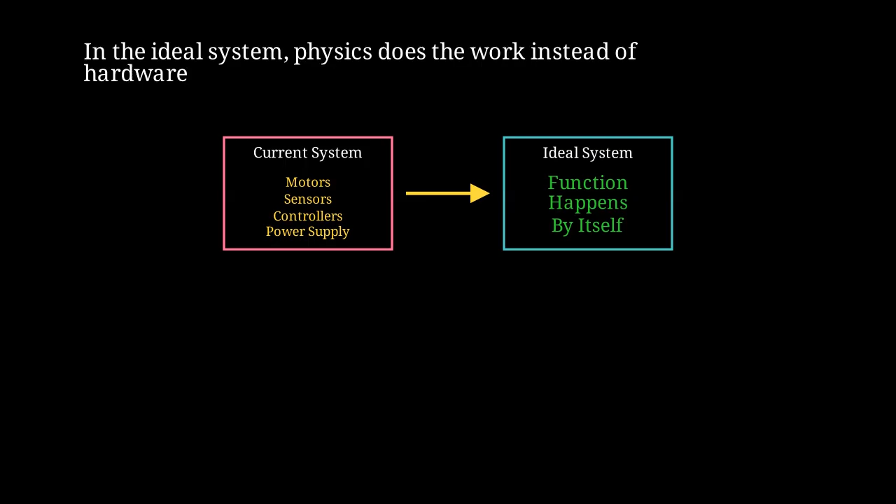Compare a current system loaded with motors, sensors, controllers, and power supplies versus an ideal system where the function simply happens by itself through clever use of natural phenomena. The IFR rests on three fundamental pillars that define what makes a system ideal.

First pillar, zero cost. The ideal system requires no money to build, maintain, or operate. Second pillar, zero complexity. The ideal system has no parts, no assembly, no intricate mechanisms. Third pillar, zero harm. The ideal system produces no waste, no pollution, no negative side effects.

This progression shows complexity reduction from current systems with many components to better systems with fewer components to the ideal with minimal or no components. This raises a crucial question. Is the ideal solution really impossible, or is it just unfamiliar? Often what seems impossible is merely unprecedented.

Now, let us develop a rigorous mathematical framework for analyzing system ideality. Ideality equals the sum of all benefits divided by the sum of all costs plus the sum of all harms. As we approach the ideal final result, ideality approaches infinity, because the denominator approaches zero while benefits remain. In the limit as costs and harms approach zero, ideality approaches infinity.

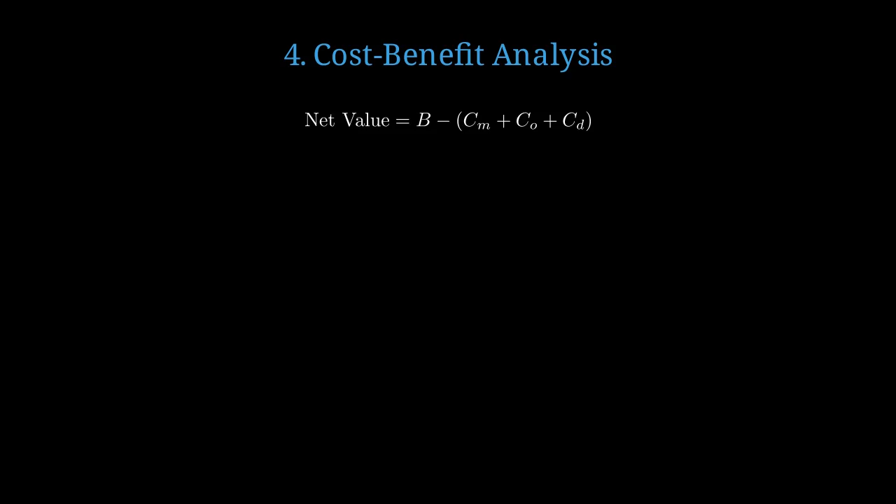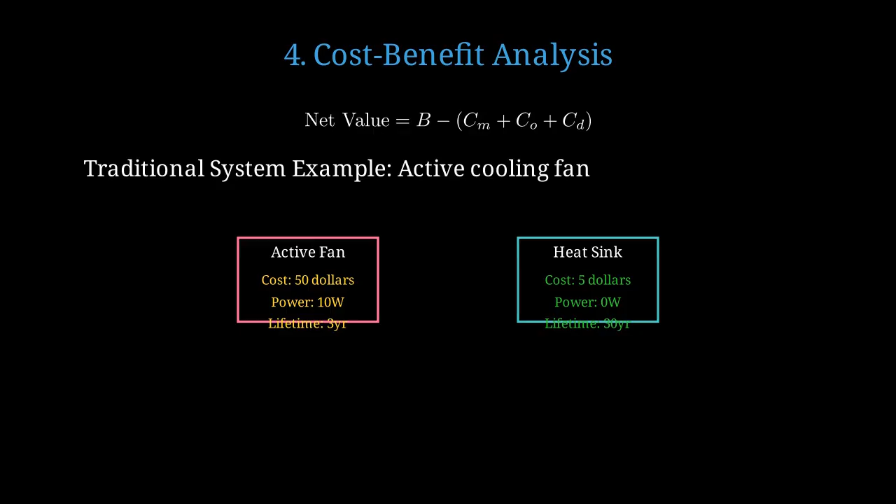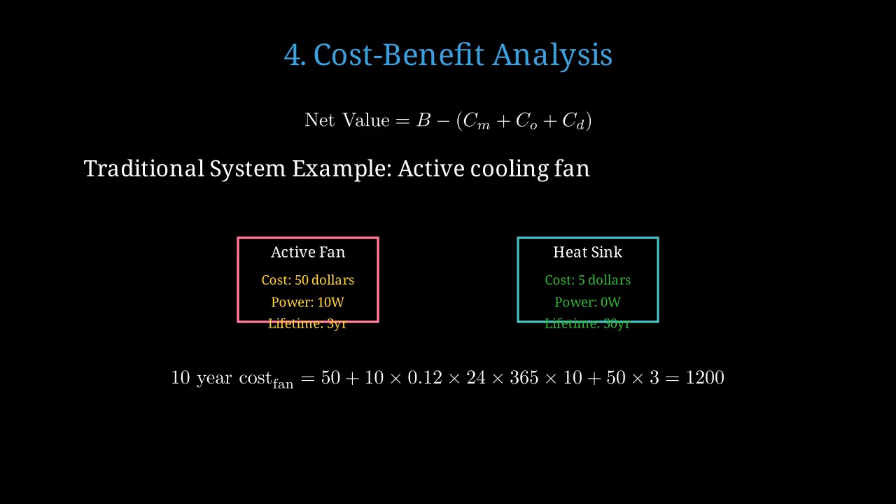Compare an active fan costing $50, consuming 10 watts, lasting 3 years, versus a passive heatsink costing $5, consuming 0 watts, lasting 30 years. The 10-year cost of the fan system is $50 initial plus 10 watts times 12 cents per kilowatt hour times 24 hours times 365 days times 10 years, plus replacement costs, totaling approximately $1,200.

The 10-year cost of the passive heatsink is just $5, with zero operating costs. The savings ratio is 1,200 divided by 5 equals 240 times more cost-effective for the passive solution. Now let us examine a concrete example, self-cleaning surfaces inspired by nature. The traditional approach uses active cleaning, detergents, scrubbing, water, energy, and human labor.

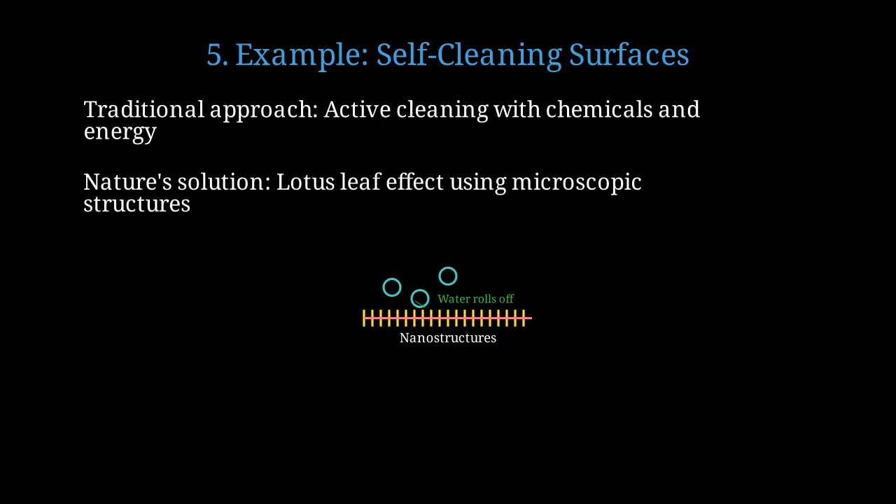Nature provides a superior solution, the lotus leaf effect, which uses microscopic surface structures to make water bead up and roll off, carrying dirt away. The lotus leaf surface has microscopic pillar structures that create air pockets, making water droplets roll off easily, carrying contaminants away without any energy input.

Cleaning efficiency equals dirt removed divided by energy input. Traditional cleaning achieves 95% dirt removal but requires 500 joules of energy per cleaning cycle. The lotus effect achieves 90% dirt removal with essentially zero energy input, giving theoretically infinite efficiency.

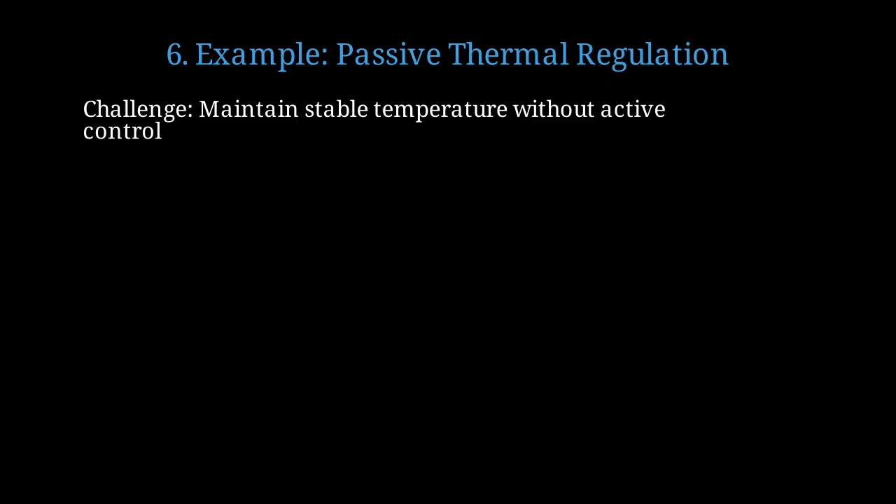Our second detailed example examines passive thermal regulation systems. The engineering challenge is to maintain stable temperature without thermostats, heaters, or air conditioning. A passive system uses thermal mass materials with high heat capacity, combined with strategic ventilation channels that open and close based on temperature differentials. Phase change materials provide even better performance by absorbing or releasing large amounts of heat at constant temperature during melting or freezing.

The heat absorbed or released equals mass times latent heat of fusion. For example, 10 kilograms of phase change wax with latent heat of 200 kilojoules per kilogram can store 2,000 kilojoules of thermal energy, equivalent to running a small heater for over half an hour with no electrical input.

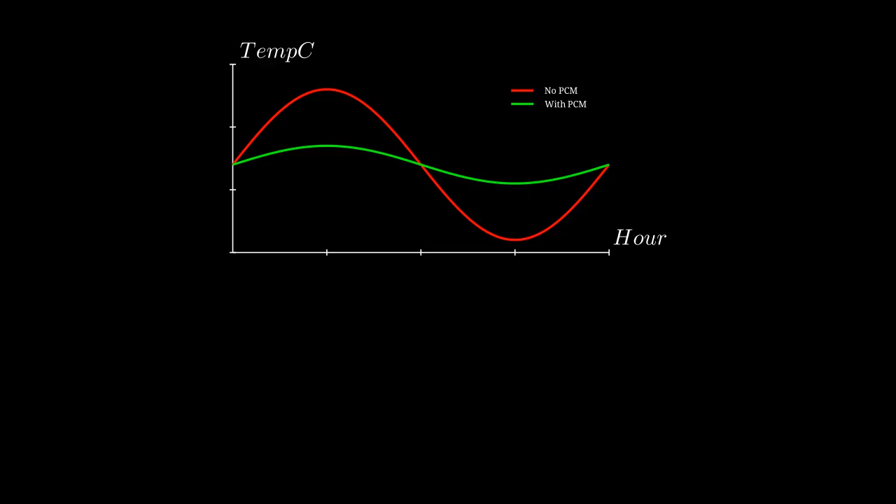This graph compares temperature variation over 24 hours, without phase change material showing large swings of plus or minus 6 degrees, versus with phase change material showing only plus or minus 1.5 degrees variation.

Our third example explores self-powered sensors that harvest energy from their environment. Traditional sensors require batteries that must be replaced or wired connections to external power, adding cost and maintenance. Energy harvesting from ambient sources eliminates the power supply entirely, achieving closer to ideal.

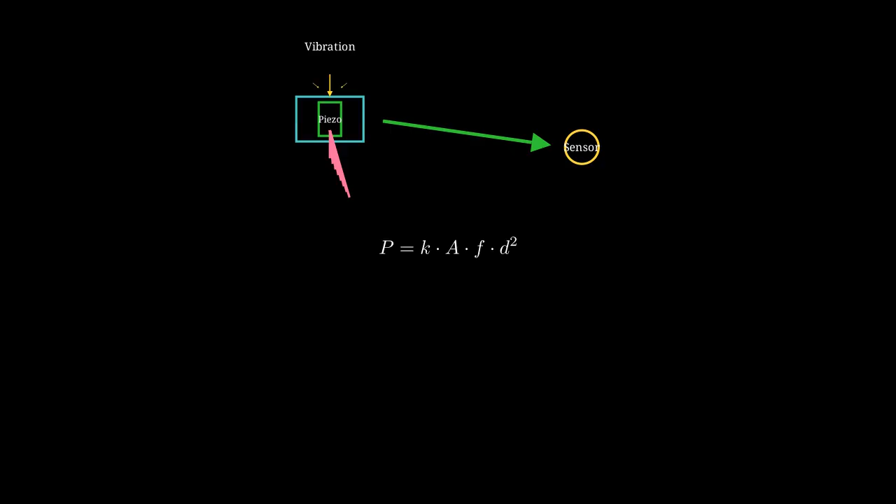A piezoelectric generator converts mechanical vibrations directly into electrical energy, powering a wireless sensor indefinitely without batteries. Power generated equals a piezoelectric constant times area times frequency times displacement squared. Consider a numerical example, a sensor monitoring bridge vibrations. With area 10 square centimeters, vibration frequency 30 Hz, and displacement 0.5 millimeters.

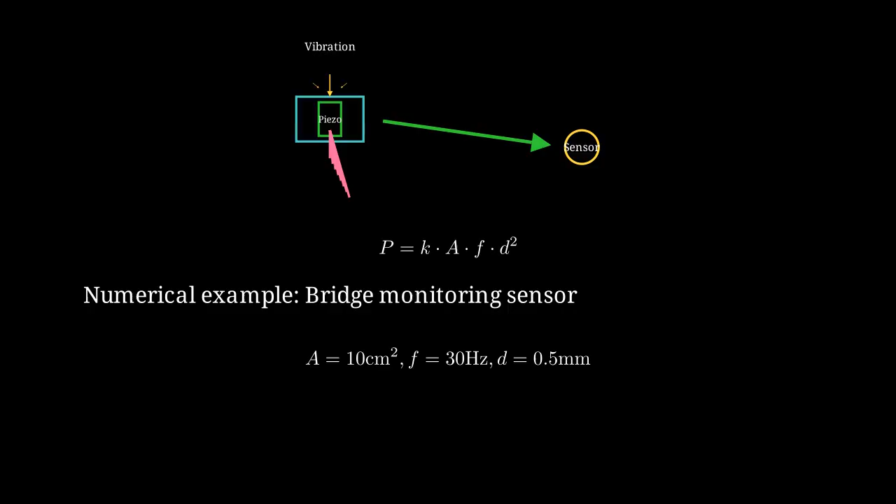This generates approximately 50 microwatts of continuous power. Modern ultra-low power sensors need only 10 to 20 microwatts in sleep mode, making this entirely self-sufficient. Battery life transitions from finite to effectively infinite, with energy harvesting approaching the ideal of zero external power.

Let us conduct a rigorous numerical thought experiment, comparing real versus ideal performance across multiple metrics. Consider a water pump system for irrigation as our case study. Compare three approaches: electric pump at $800 and 2 kilowatts, solar pump at $400 with no grid power, and gravity-fed system at $100 with zero power, approaching ideal.

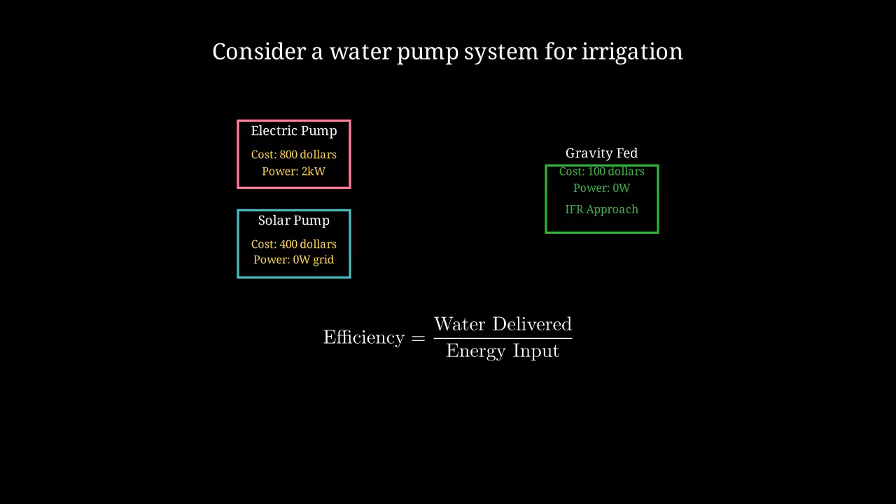Define efficiency as water delivered divided by energy input. Electric pump efficiency, 100 liters per minute divided by 2,000 watts equals 0.05 liters per minute per watt. Gravity-fed efficiency, 100 liters per minute divided by 0 watts approaches infinity, the theoretical ideal.

Now let us analyze weight and complexity as quantitative metrics of ideality. Specific function equals function value divided by system mass, similar to specific impulse in rocketry. Example, temperature regulation for a 100 cubic meter space.

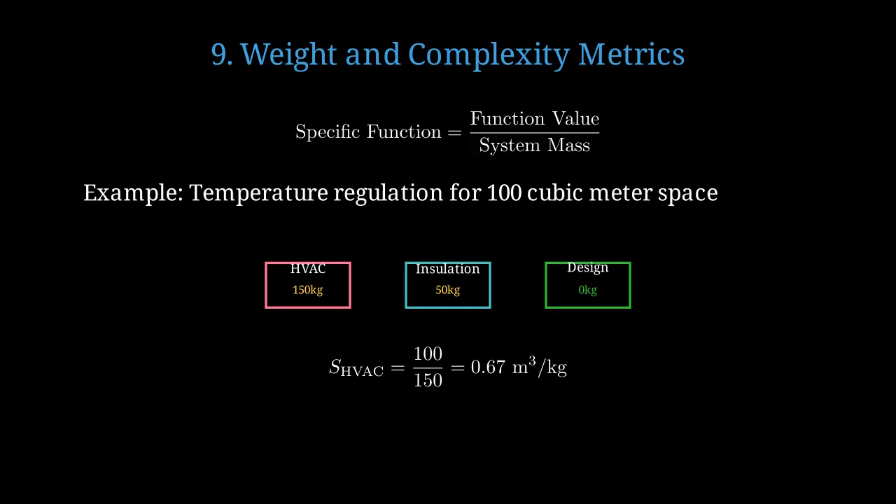HVAC system weighs 150 kilograms, enhanced insulation 50 kilograms, but optimal architectural design achieving the same temperature stability weighs 0 additional kilograms. HVAC specific function, 100 cubic meters divided by 150 kilograms equals 0.67 cubic meters per kilogram. Design-based specific function, 100 cubic meters divided by 0 kilograms approaches infinity, again approaching ideal.

Now we address the practical methodology. How do we systematically work backwards from the ideal to achievable solutions? Step 1. Define the pure function you want, completely divorced from any implementation details or current technology. Step 2. State the ideal final result. The function happens by itself, with no system.

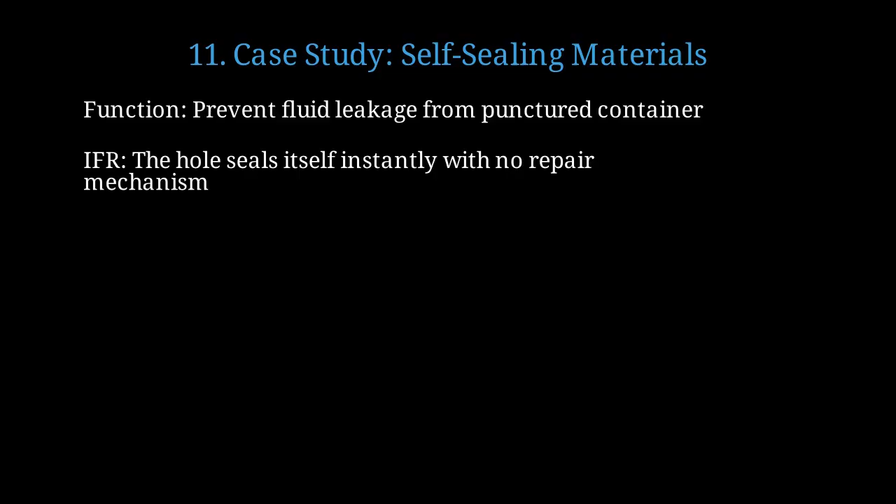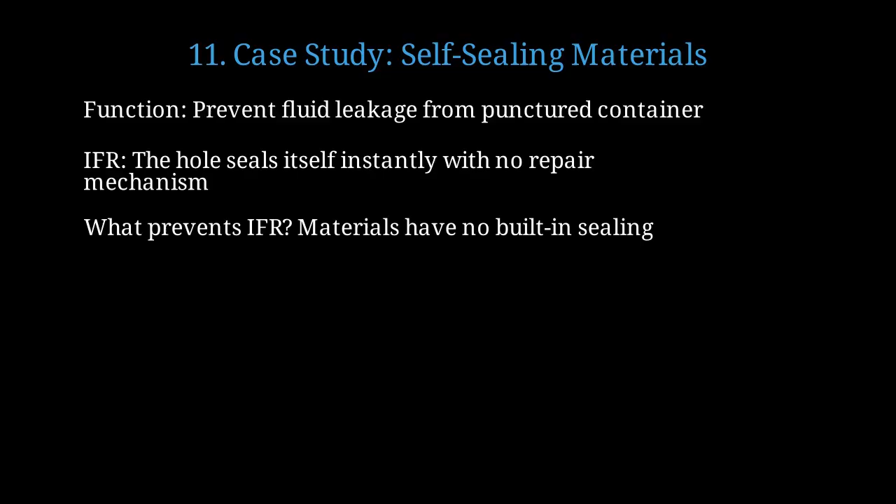Self-sealing materials. The desired function, prevent fluid leakage from a punctured container. The IFR, the hole seals itself instantly with no repair mechanism needed. What prevents achieving this ideal? Conventional materials have no built-in sealing response to damage. Solution closer to ideal. Embed liquid sealant in microcapsules throughout the material structure, so punctures break capsules and sealant flows into gaps automatically.

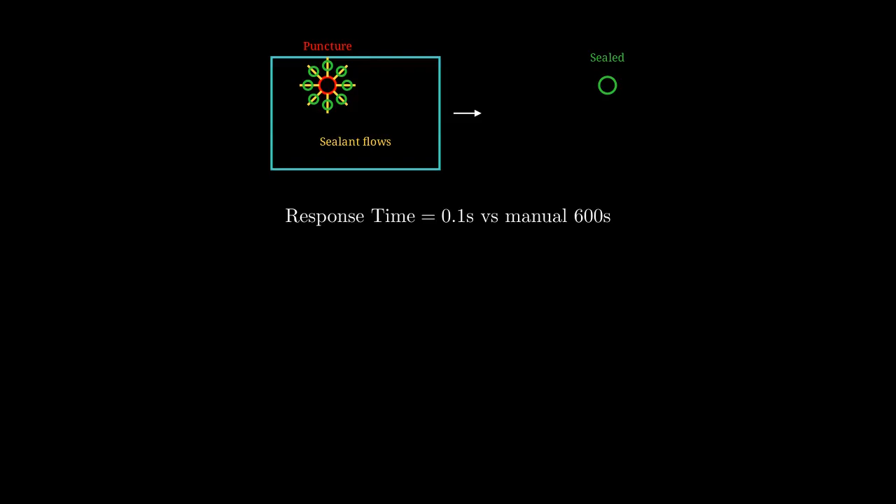Response time, 0.1 seconds for self-sealing versus 600 seconds for manual repair, a 6,000-fold improvement. Added mass, only 5% for embedded microcapsules versus 200% for carrying a complete repair kit.

A major challenge in applying IFR is overcoming psychological barriers that limit our thinking. Psychological inertia causes us to assume we need a physical thing to perform any function. The key question to ask: can the environment itself provide this function naturally? Shift from component addition thinking, where we add parts to solve problems, to physics utilization thinking, where we harness natural phenomena.

Return to our central question: is the ideal solution really impossible, or is it just unfamiliar territory we have not explored? History consistently shows that yesterday's impossible becomes today's standard practice. Now let us discuss the practical strategy for implementing IFR in real engineering projects.

Define an ideality score, 1 minus the ratio of actual cost to maximum acceptable cost, minus mass ratio, minus harm ratio. Track the ideality score through design iterations to ensure progress towards the ideal. Target the highest possible ideality score by systematically eliminating or minimizing costs, mass, and harm.